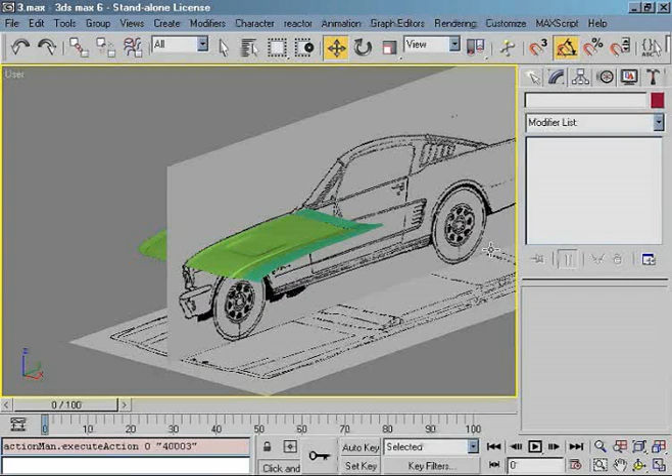So let's start. First of all, we need to create the side of the body. To do this, I'm going to copy these edges in the side view. Now that I've copied them, I need to move them a little to the front to position the vertex exactly over the middle of the wheel.

Now I need to equalize the new vertex. This will be easier when we have an equal wire, and this will help us gain a smooth and more perfect shape.

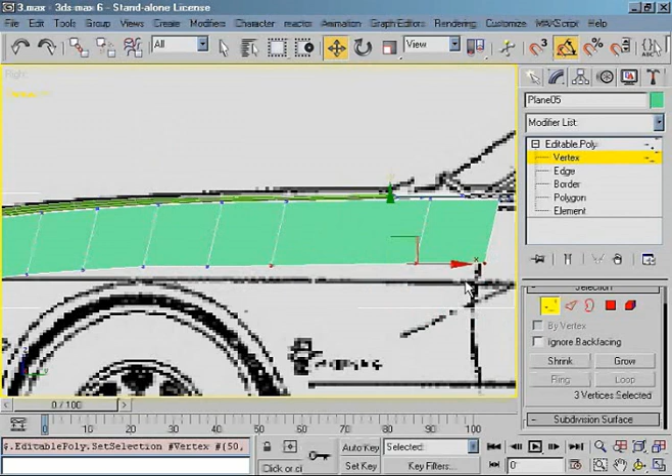Alright, now those vertexes are on the front and a little to the top. And the next one - as you can see, those first vertexes are too far. Just look at the blueprint. I will have to move them back to position them correctly. I think that's going to be enough.

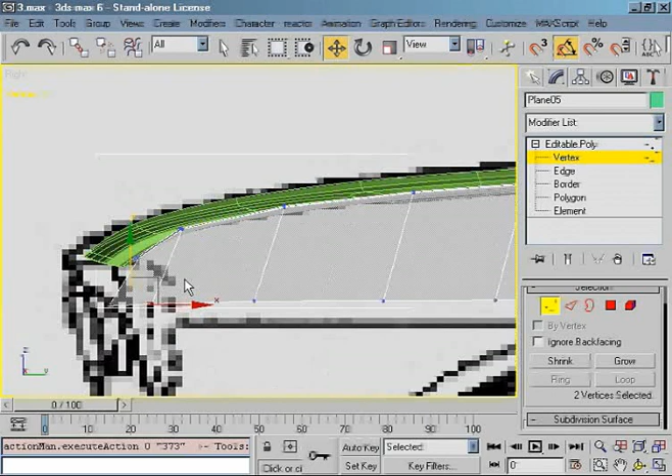Now I think I'm going to move the third vertex back a little bit as well, and I'll change the position of this vertex too.

Once we have that completed, let's go to the front view, because I'm going to have to position the new edges to the blueprint. Alright, that's going to be good right there.

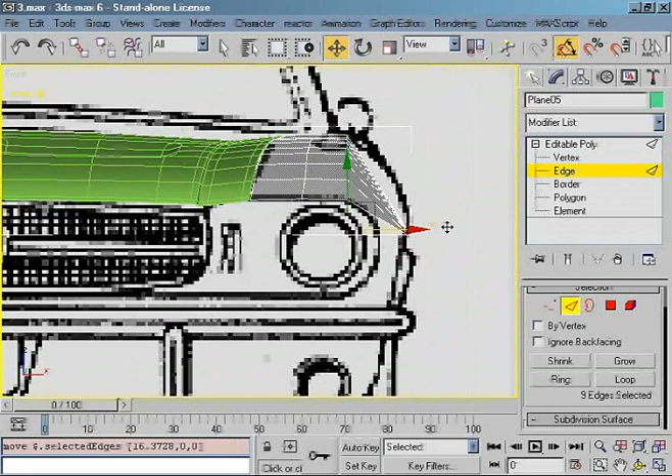Now in the top view, we should position the front vertex exactly to the blueprint, because as you can see, it doesn't match the original shape. I'm going to move this vertex just a little bit, but I'll have to go ahead and correct its position in the front view.

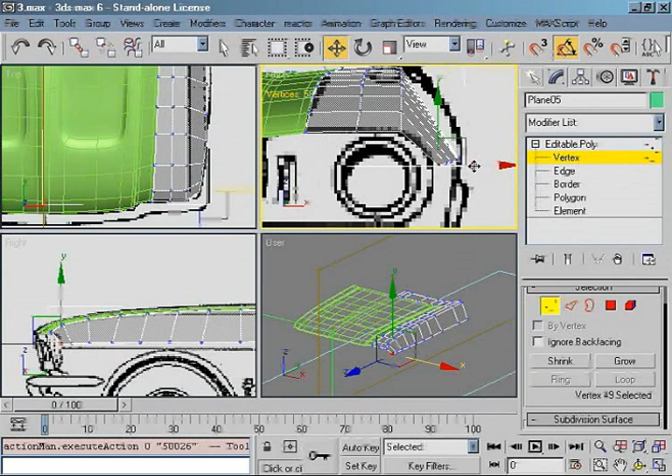Alright, that's going to look just about right. Now I'm going to have to thicken my wire by adding new segments. As you can see, those two vertexes don't match the rest, so I should improve it to correct the shape.

Now I'm going to have to move all those new vertexes to make a nice arc, just like on the blueprint. You'll need a little experience in work like this, but after a few models you will know how to position vertexes to gain a smooth shape.

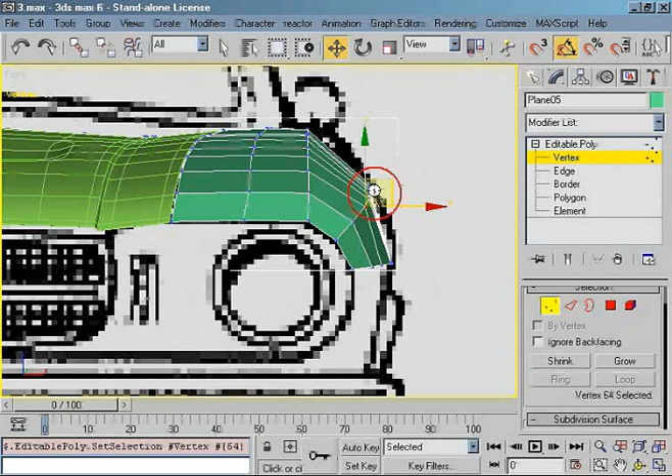I think my shape is going to be just about right now, so I can add another line of vertexes, because I need to get a higher number of polygons here. Okay, now again I need to reposition the vertexes to gain a smooth arc.

Now I have to make equal lengths between the vertexes, and this is very important, because the more equal the geometry, the smoother the surface we're going to get. Alright, that's nice, but I'm going to need to improve the position of the vertexes in the front.

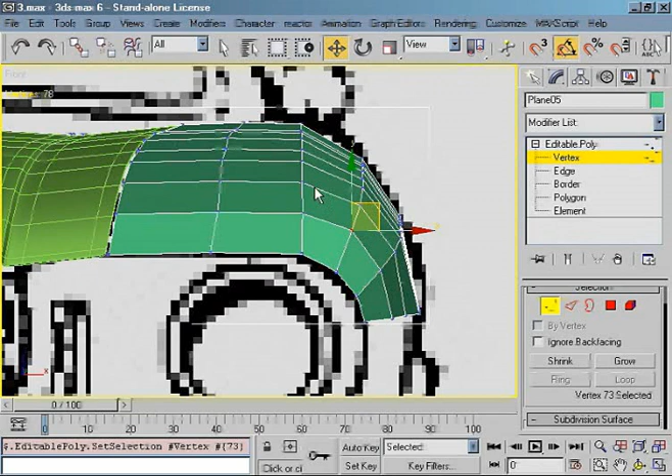Just like that. Maybe I'll move this a little bit too. I think that's going to be just perfect now. Oops, I need to move this last vertex just a little bit.

Now I'm going to have to try to edit this geometry to build a nice looking hump. First of all, I'll have to cut these edges. I'll make the top of the hump from this new vertex, so I have to move them up a little bit. Okay, now I just need to weld those vertexes, and that should be good.

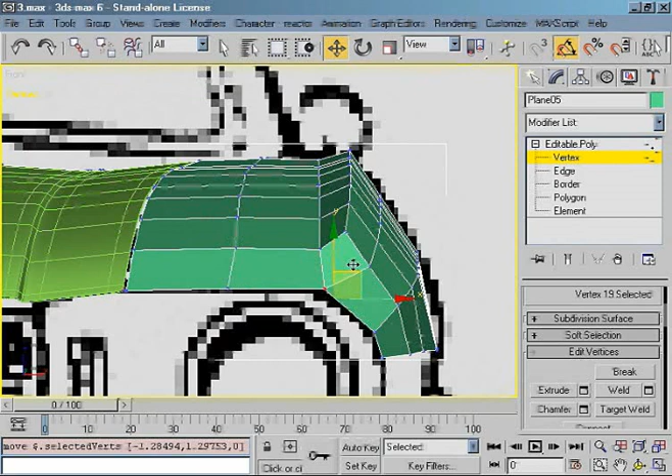I need to do this to reduce the 5-sided polygon. Remember, you should always try to build geometry, especially with 4-sided polygons. Alright, I'll move this welded vertex a little bit, which will give us a nice smooth arc.

Now I'm going to leave the hump just like it is now. The geometry of this element is good, so later I'll change a few details on this, but now I want to go ahead and make the top part of this element.

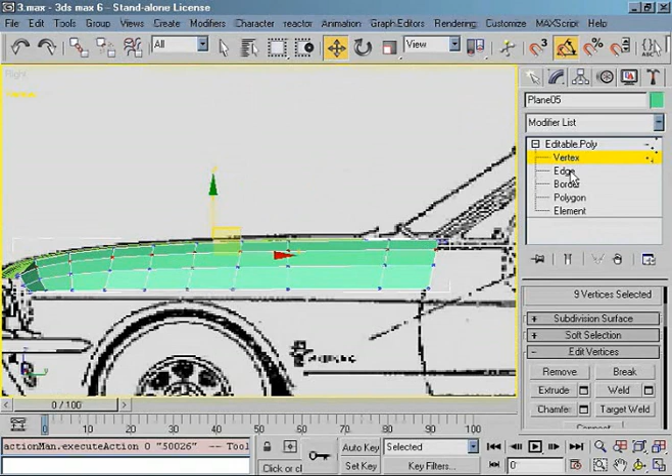First, I'll add a new segment here, which will give us a nice and equal geometry. Okay, now let's go ahead and copy the bottom edges, but just a little bit. So now the vertex is exactly on the line of the wheel.

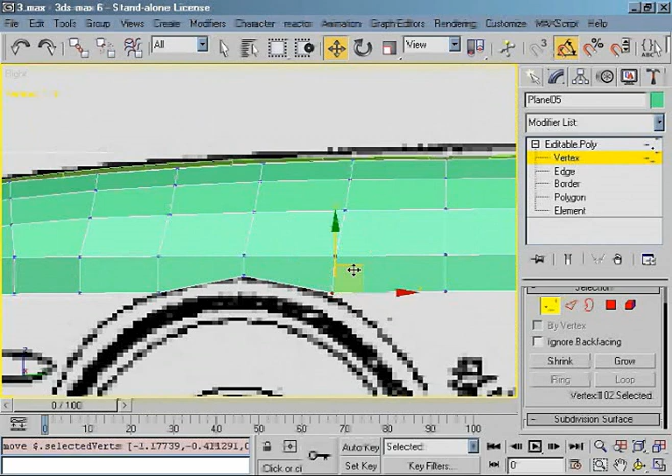Now I'm going to go ahead and select all the vertexes except this one in the center and move them down. And maybe I'll correct this vertex just a little bit right here. I'll go ahead and copy the bottom edges again once I've adjusted the vertexes, but this time without two edges in the center. This will give us a nice wheel.

It's a good method to build such elements because all the polygons we created are 4-sided. Of course, I need to position the new vertexes to the blueprints as usual, and I'll have to change the geometry a little bit by moving the other vertexes. I need to pay attention when moving my vertexes because we can destroy the nice shape that we've already created.

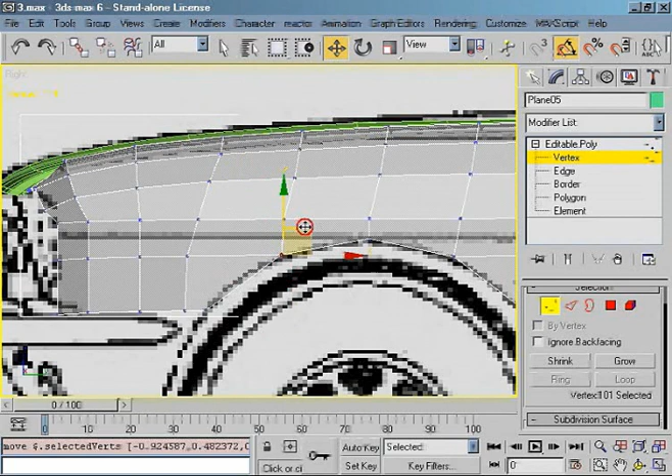Alright, I think that's going to be just, move that one a little bit as well. There we go. I think that's going to be good right there.

Once we've gone ahead and done this, we're going to need to change viewports to the front view. Because remember, we need to position all of the wires and all the viewports, not just one.

As you can see, I'm moving this vertex over to the left to gain a little bit better shape. Alright, that's going to be good right there.

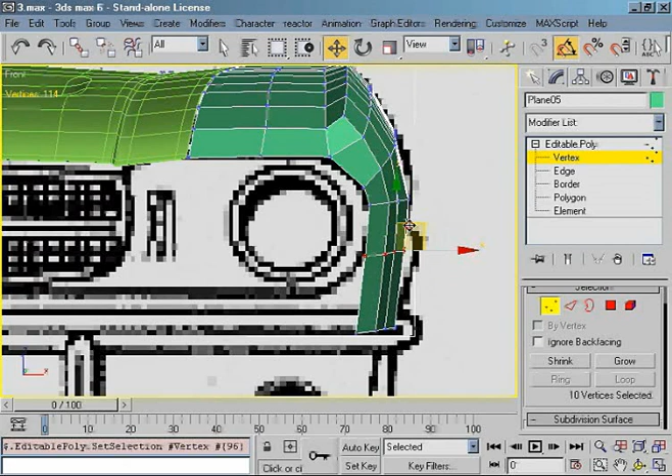Now we're back to the side view, and I'm going to continue copying the edges to create new segments. We do exactly what we did before: copy edges, and then go ahead and position the vertex to the blueprint. Now, I'm going to need to correct the geometry of the other vertexes as well.

Of course, it's not necessary, but I like to have a clean and equal wire across our polygons. This helps a lot when you're doing your work.

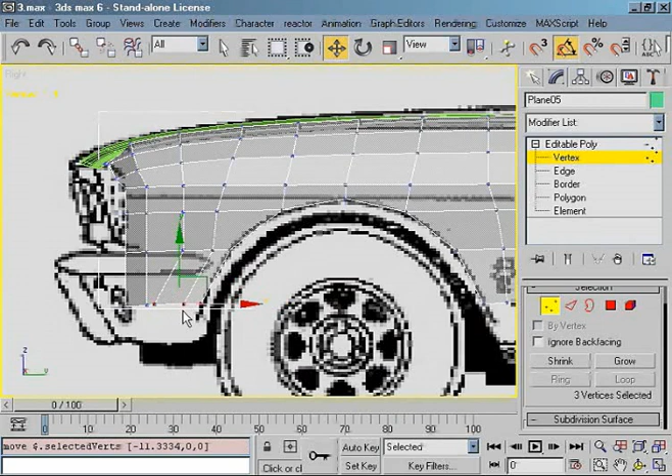Now, we're going to have to go ahead and do the other side of the wheel here, and I won't position this vertex precisely because I don't want to waste the time, but it's good to spend more time to make it correct. And now I'm going to copy these edges one more time to make another segment, which will be the last time.

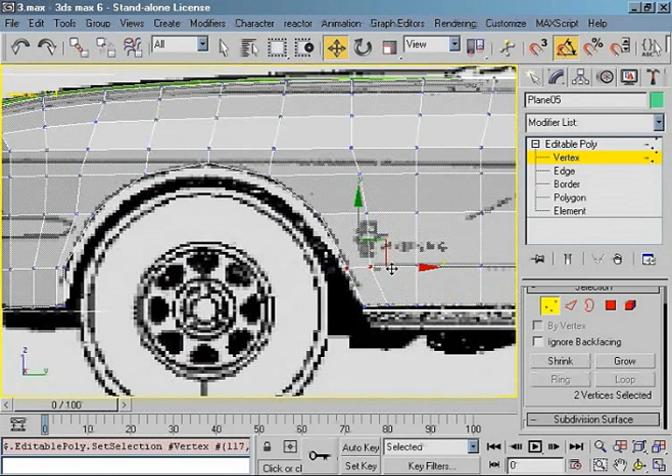Alright, now we just need to do a little bit of work with the vertexes again. Alright, that's going to be good right there.

So let's go ahead and use NURMS subdivisions to see the results of our work. Well, as you can see, it's perfect.

Now we need to correct the position of the vertex in the front view again. It'll be easy because the vertexes on both sides of the wheel are on the same level.

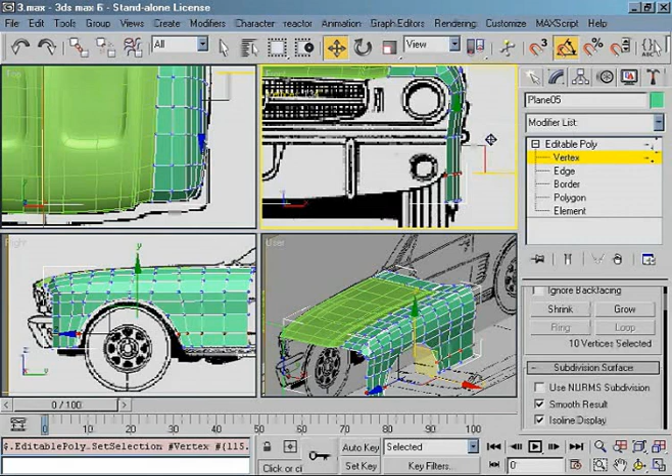So let's go ahead and move a vertex a little bit to the left, and I want to gain a nice arc. Alright, I think that's going to be good right there.

But as you can see, there's another big mistake between the blueprints. The bumper is higher on the front blueprint than it is on the side blueprint.

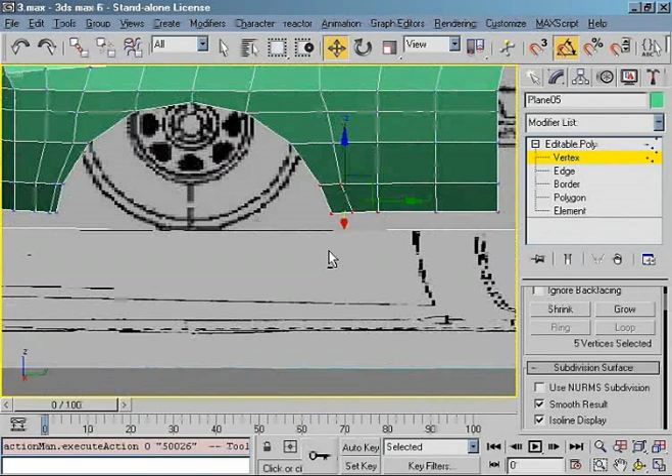Alright, what's next? Maybe we should go ahead and look at those vertexes. We need to move them away from the center of the car. Look, on the blueprint, this line should be more straight.

There we go. And we're going to adjust that one as well. That looks better now.

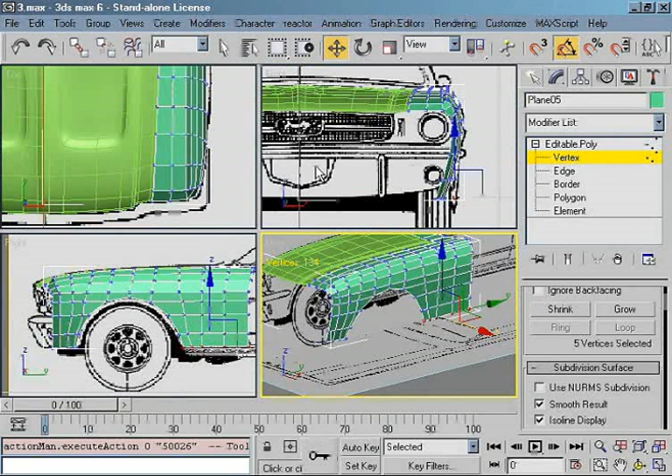Perfect. Now I'm going to show you the fast and easy way to model the details on the wheel. What we're going to need to do is model some kind of extraction here.

We'll do this by copying the edges of the wheel. So let's go ahead and select all edges. And now I need to scale them down with the Shift key pressed.

Alright, now that we've got the new segments, we need to position the vertex so they will be suited to the blueprints.

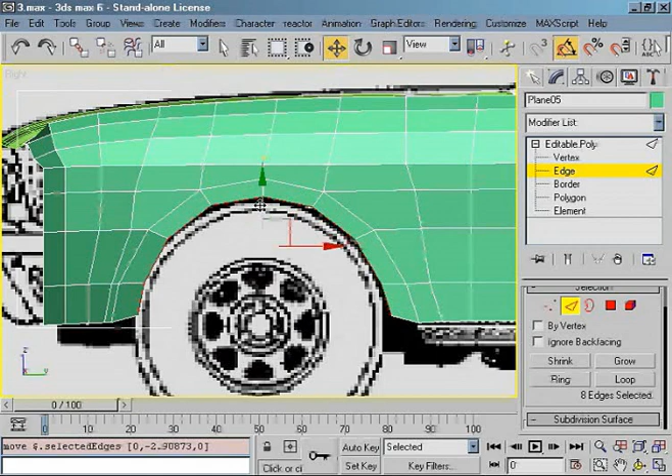As you can see, I usually work with the objects in transparent mode so I can see the blueprints. Just a reminder that you can make your object transparent by pressing Alt-X on your keyboard.

Okay, now I'm in the middle of the wheel, on the next vertex. I know this takes a little bit of time, but you need to be patient, because we want to make it as precise as possible. Now we just need to do these last two vertexes, and that's going to look good right there.

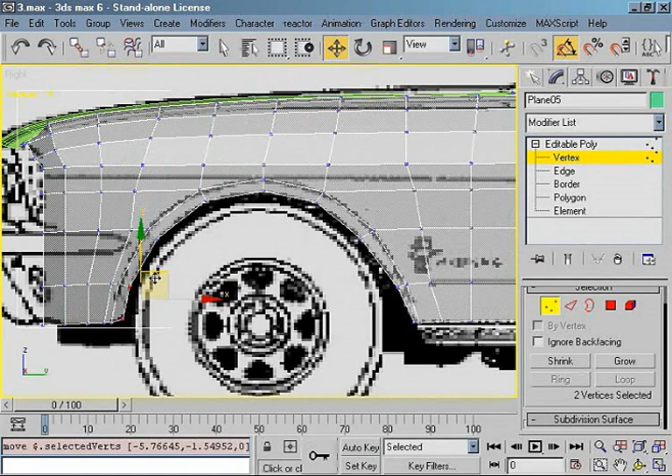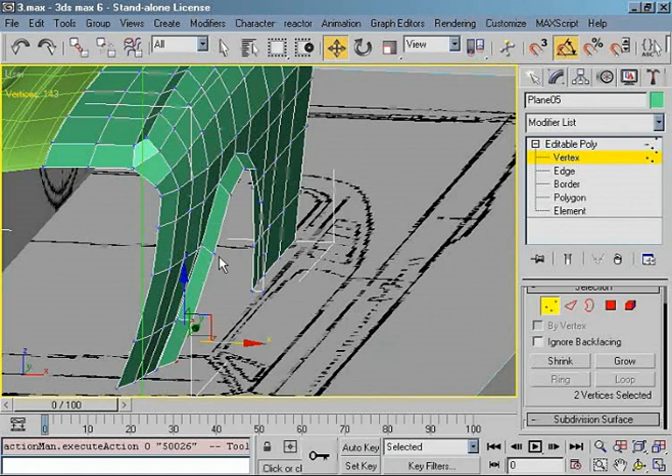Now we can simply move all of the new edges of the wheel away from the body to gain a nicer extraction. We'll just take a few little adjustments here, and be reminded, go through and take your time, follow your blueprint scales to get the position that you need, and we'll go ahead and move these a little bit over.

I need to make a nice shape, so we'll go ahead and position the bottom of the vertex near the car body as well. There we go. Just do a little bit more work on your vertexes and get them sequential across.

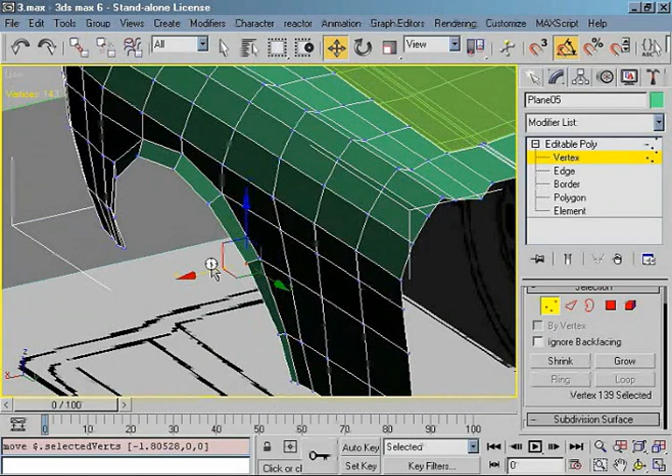Alright, now let's go ahead and see how it looks with NURMS subdivision. Okay, that looks pretty good. We have to do one more thing, make a more sharp transition between the extraction and the car body. Now there's this little bug in the geometry on the front, but we can go ahead and fix that later.

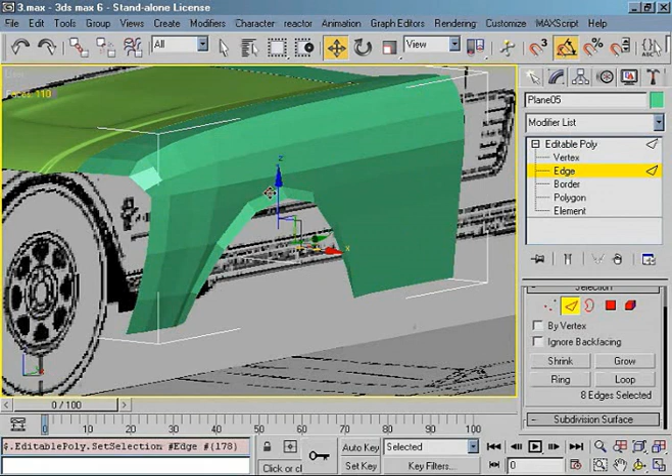Now we need to select all of the edges, which are going to be our four transitions between the extrusion and the body. Next, we're going to go ahead and add a little bit of chamfer on them. Once you have them selected, we'll just right click and use our chamfer tool. Now let's go ahead, once we've done that, and add NURMS subdivision.

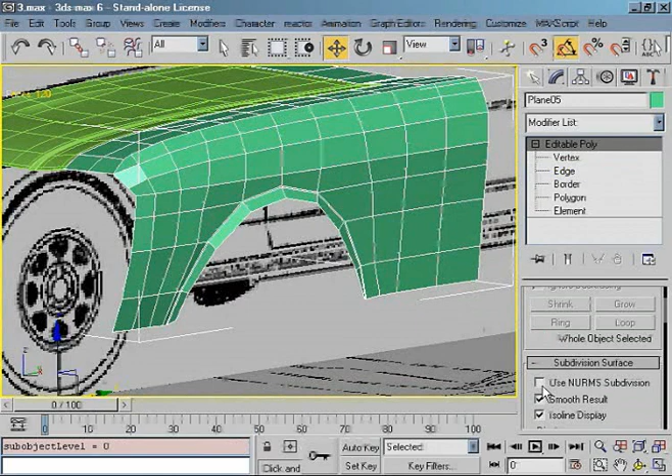As you can see, we need to go ahead and improve the geometry just a little bit. In two places we've got some bugs, but we can fix those pretty fast. We just need to weld these two vertexes, which were created in the chamfer process.

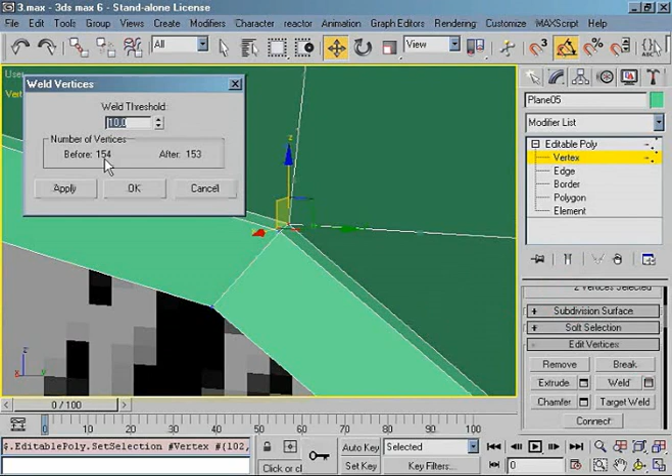We'll go ahead and select these two vertexes and go down to our options on the right and weld. Also, if you don't want to find the weld option all of the time, you can go ahead and make a hotkey and weld the vertex faster.

I think I'll go ahead and show you how to do this. We need to find the Customize User Interface, and choose editable polygon object as category. Next, we need to find our option, this time weld vertex, and choose a hotkey. In my case, it's Control X, and that is all.

Once you've selected what hotkey you want to use, you'll be able to use that hotkey to do the weld vertex function much faster, without having to scroll through the options. All you need to do is select the vertex you want to weld, and press your hotkey, and voila.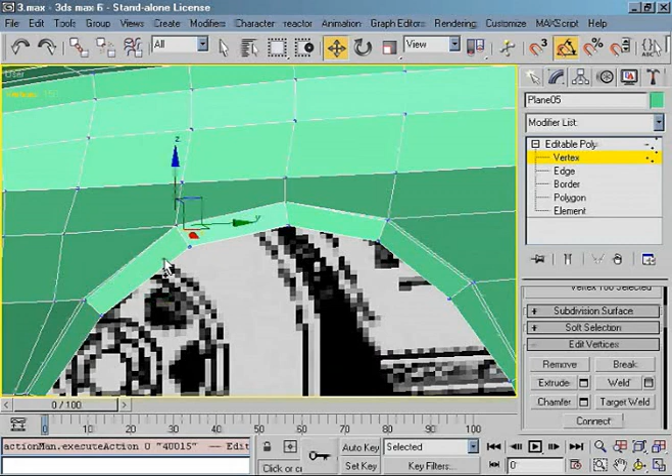Alright, now our geometry is correct. We're going to go ahead and add NURMS subdivision to show you. As you can see, everything is okay. But remember, I have to improve a little bit on the body because there were some bugs earlier.

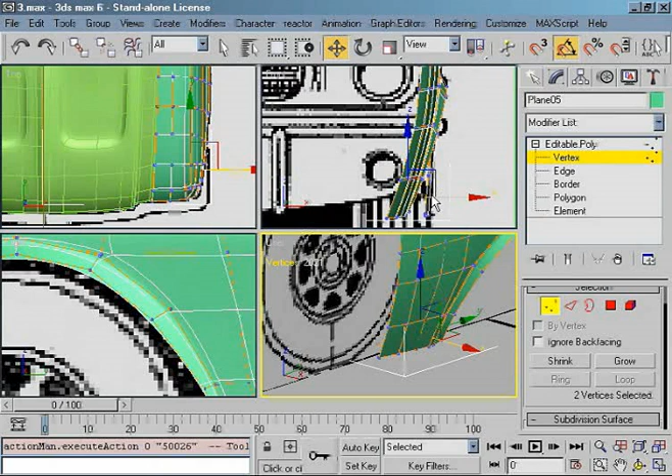There we are. Go ahead and uncheck your NURMS subdivision and let's select our vertexes and move them a little bit. Sometimes you really can't see bugs in the geometry when you're working on low poly objects, so it's good to add NURMS subdivision or a mesh smooth modifier.

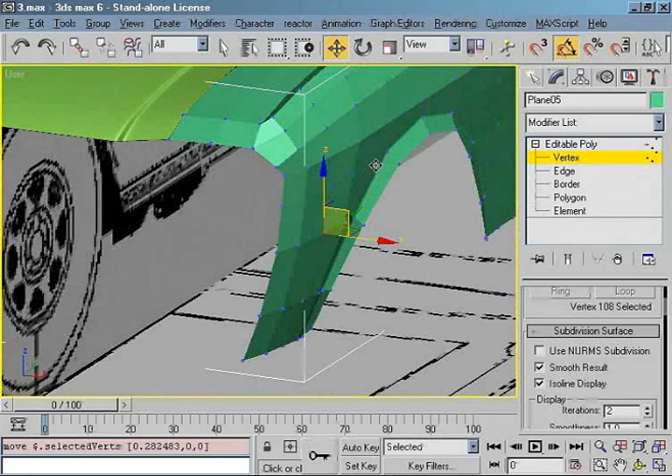Sometimes you can even assign to the object a material with a high level of glossiness and reflection, and with this you'll be able to see the light refraction, which will uncover a lot of flaws.

Excellent, now it's fixed. We're going to go back to the hump and make a sharper edge, because they don't look real, kind of like a toy car.

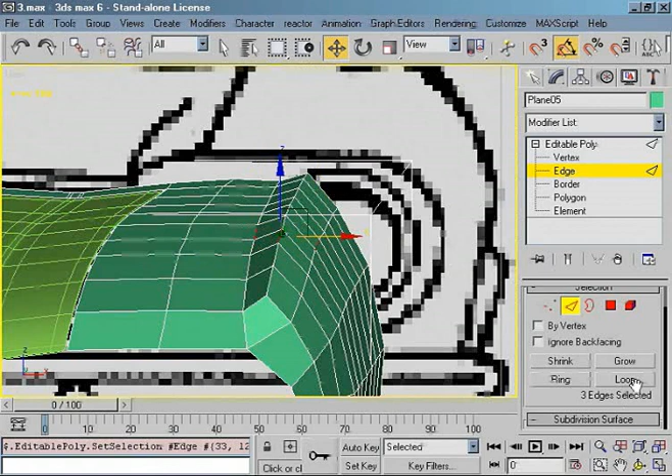As always, we're going to go ahead and use the chamfer tool again to gain a more angular shape. So let's select the edges we're going to chamfer, and remember the loop tool, which can save a lot of time. But we don't want to chamfer these edges down here, so we're going to deselect those. Now we're ready to chamfer the edges that we want.

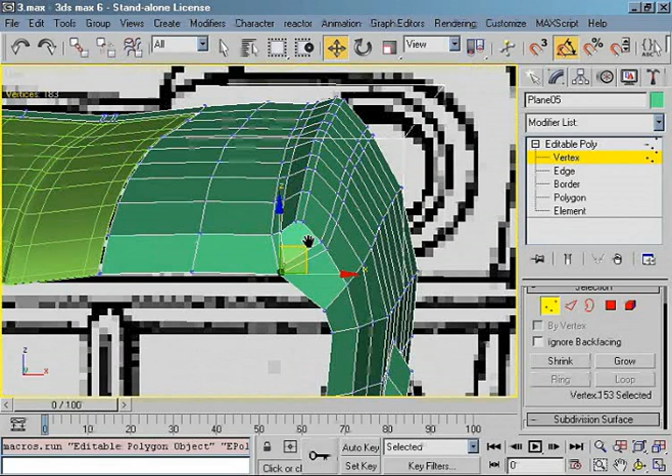Excellent, that's going to look good right there. Now, of course, we need to correct this operation. So I'm going to weld the two vertexes, and I'll need to change the position of the vertex on the right side of the hump, because I want to have sharp edges only on the top of the hump and on the left side of it, and the right side should be smooth.

Alright, this vertex is incorrect right here. I need to move it. And now I need to increase the distance between our vertexes, which were created in the chamfer process. Now they are too close to each other, and this could make a more angular effect, which we don't want to have. Now let's see how this looks.

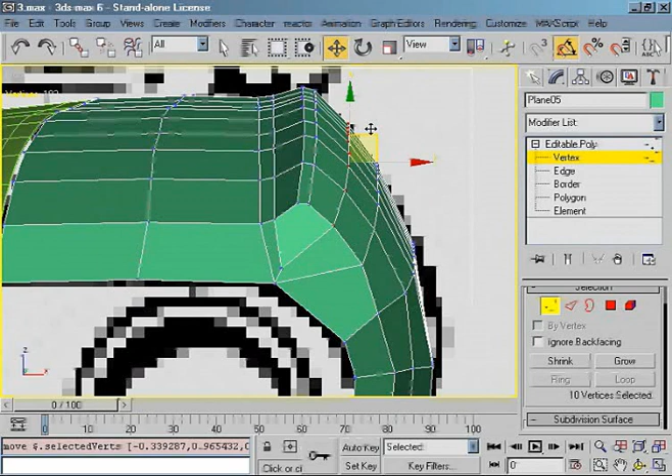That looks to be okay. But let's look from another angle. Oops, looks like we've got a problem here. So let's go ahead and improve it right now, because it won't take too much time. We just need to move a few vertexes a little bit, and that should be alright.

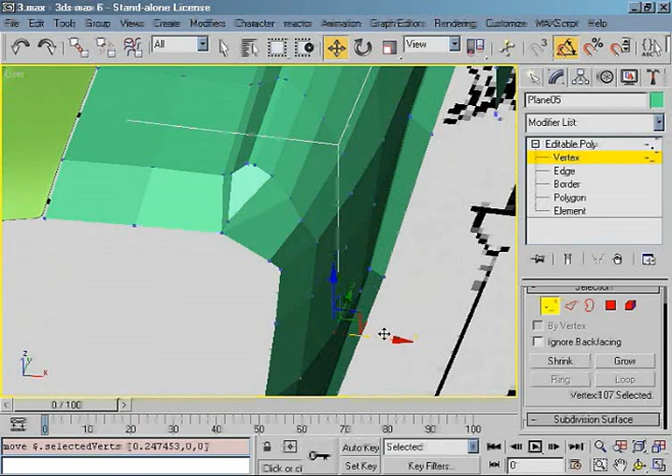Okay, let's go ahead and improve the front of the hump. I need to weld 2 more vertexes to reduce the 5-sided polygon that we have. So we're going to select our vertexes that we need to weld and use our hotkey. Now we're going to have to correctly position the vertexes.

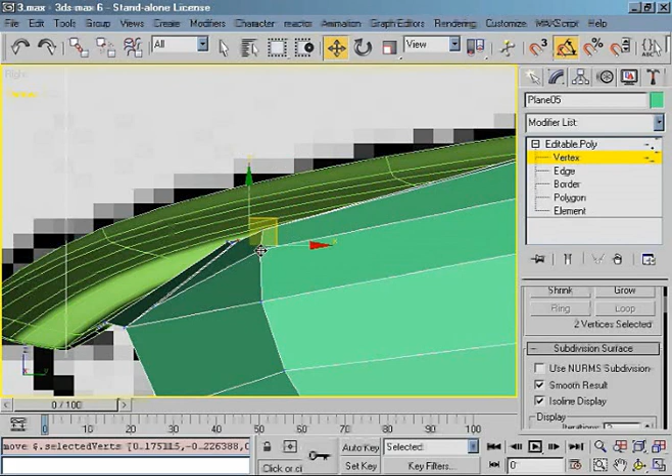Go ahead and turn off NURMS subdivision again, and we're just going to need to do a little bit of vertex work and adjust a few tweaks here. I'm going to pull that vertex down, select the one below it, and move that. There we go, that's looking a little bit better and more real. So turn NURMS back on, and let's check it out. That looks a lot better.

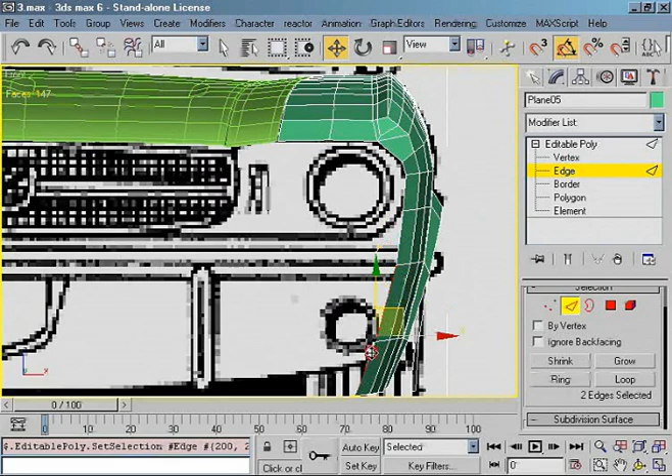Now I'm going to go ahead and make a base for the front shape of the car. But this is pretty easy. I'm only going to need to have a few vertexes, so I just need to copy a few of the edges. And I'm going to go ahead and cut the video here and come back when it's done. Okay, now we have a simple front.

Now I'm going to go ahead and create a cross line on the body, and I have to choose the edges that are going to be in the place where this line should be. Of course, we're going to use the chamfer tool.

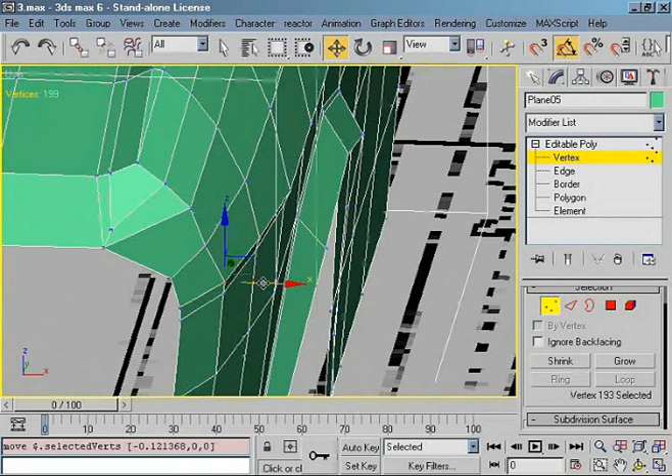I will move a little bit of the upper edges, and it'll give us a nice break. Now I'm going to move the vertex a little bit to correct the shape. I want to have a smooth crossing between the body and this new line. There we go, that looks good.

Now I need to weld those 2 vertexes, and I'll create a 3-sided polygon. But don't worry, we can correct this very soon. First, I need to cut those polygons above our new line.

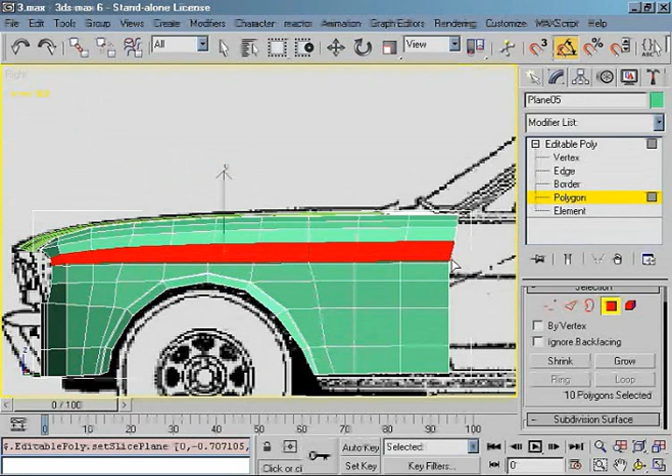I'll use the quick slice tool. In the second chapter I showed you how to use it. I'm going to go ahead and copy all of our polygons that we need to do and use our quick slice tool that I've shown you how to do in chapter 2. And once I've done the quick slice, now we've got a line cutting through all the polygons that we have selected, which is exactly what we wanted to do.

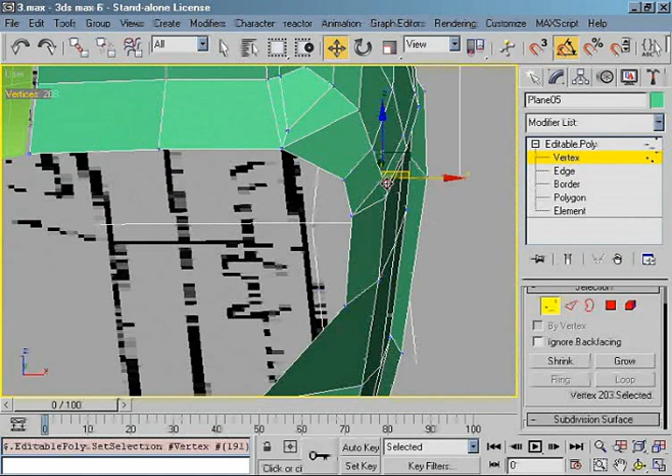Excellent, now we've got the 4-sided polygon that we needed. And maybe I'll move this vertex just a little bit here. Now I'm wondering, how does this look? Well, it looks nice. This is the end of the chapter for now.

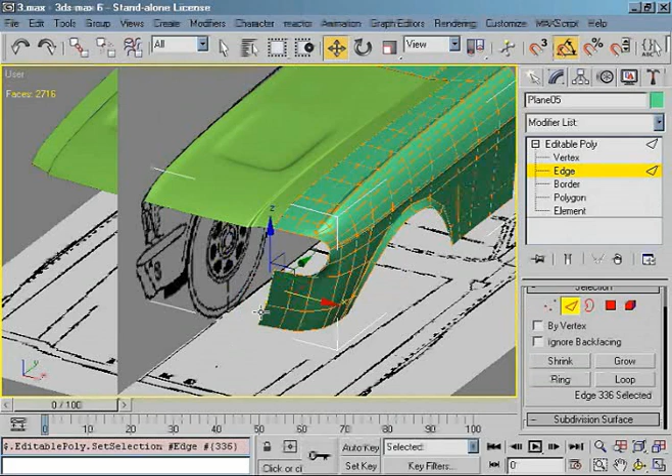We've created a good looking wheel and 2 hard elements like the hump and this cross line. Now we need to model a few elements like the front of the body, but that will be an easy process, so I'm going to go ahead and do this process by myself.